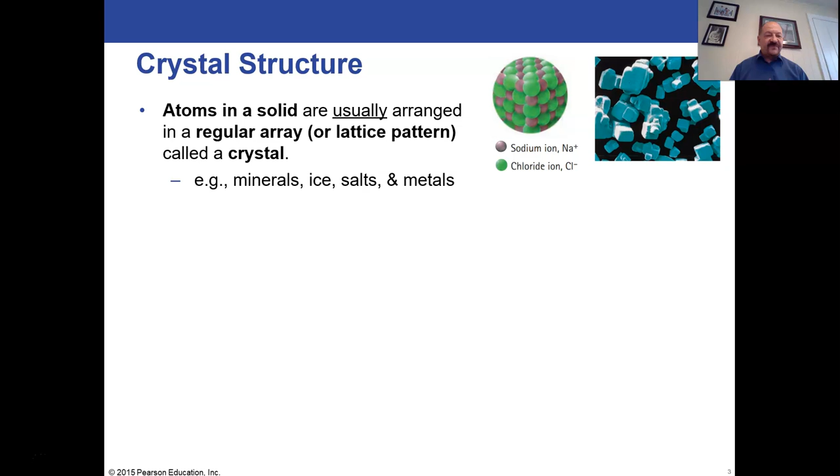So you have this very regular lattice form in a lot of crystal structures. One way that people took advantage of this very regular repeating pattern in the structure is by trying to analyze it with X-rays. It turns out that if you bombard crystals with X-ray beams, X-rays have very, very small wavelengths, and depending on which wavelength you choose, those wavelengths can actually match the size of the atoms, or the frequencies can match the energies of the bonds between the atoms.

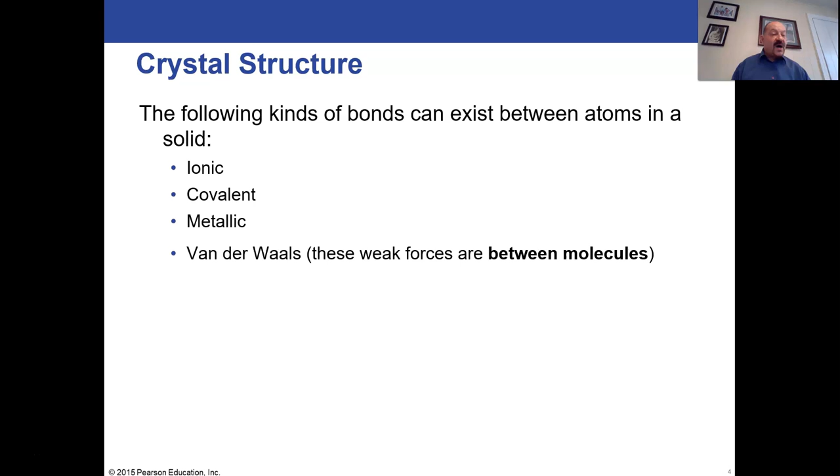We also have a fourth kind of bond, which is actually a collection of different weak bonds between whole molecules. You don't see these so much between ionic and metallic compounds. You see them with covalent compounds - here's a covalent compound and here's a covalent compound, and they have a weak attraction towards each other. There are various types of these weak attractions, all put under the catchphrase of van der Waals forces or van der Waals bonds, named after a famous scientist named van der Waals.

The properties of any solid are dependent on a couple things: which bonds are being used to keep the atoms together, and which atoms are being kept together. That will really determine the properties of that particular solid.

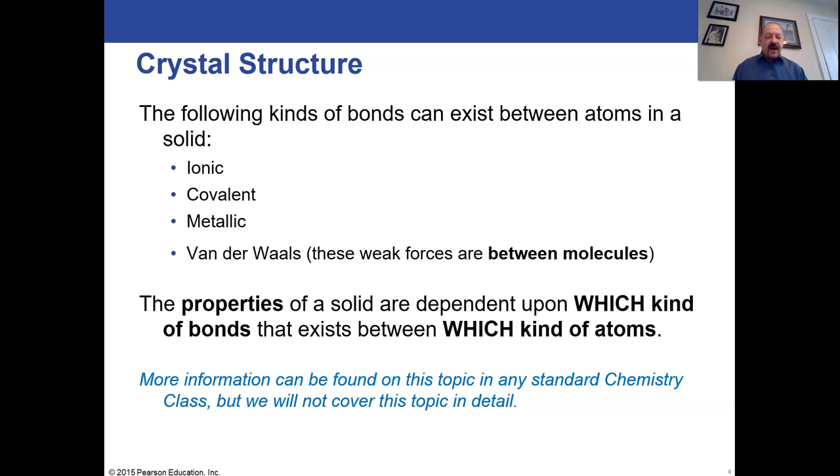Now, obviously, this is not a chemistry class, so if you want more information, I'm happy to give it to you - I teach a lot of chemistry courses, I've taught several at Del Tech, but we're going to focus more on the physical aspects from here on.

Density is a physical characteristic of solids. It's also a physical characteristic of liquids, gases, and even plasmas. It is the amount of mass per unit volume - take the amount of mass, divide it by the amount of volume, and you get the density. This can be thought of as how much stuff do I have crammed in a certain amount of space.

So if I have 1 centimeter cubed - taking a centimeter, which is less than half an inch, and making a box where all sides are a centimeter - that's a cubic centimeter. That box, a cubic centimeter, also called a cc, also called a milliliter, these are all equivalent. If you ask how many grams are in that space, that would be the number of grams per milliliter, or grams per cc, or grams per cubic centimeter. Those are all the same unit.

Here are some of the units, and the ones I just talked about are on the right. The first three in that group: grams per centimeter cubed, grams per cc which stands for centimeter cubed, and grams per milliliter - that's because a centimeter cubed is a thousandth of a liter. A liter is a box about the size of a cigarette by a cigarette by a cigarette. That's a liter box, and if you divide that by 1,000, you get a cc, or a milliliter. Milliliter literally means thousandth of a liter.

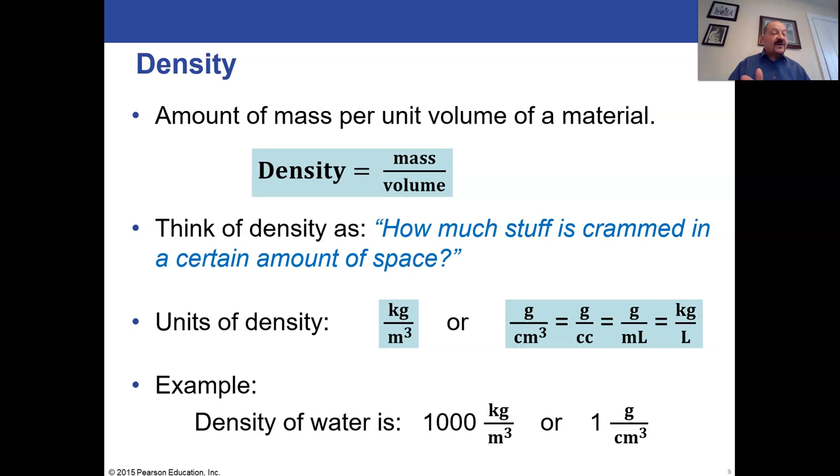1 gram per centimeter cubed, or 1 gram per cc, or 1 gram per mil, is the same thing as 1,000 kilograms per meter cubed. That's because kilogram per meter cubed is a 1,000 times smaller unit than grams per centimeter cubed, and therefore you need a 1,000 times bigger number. So the two values are exactly the same, it's just you're accounting for the different units.

Weight density is very similar to the regular density, which is really a mass density. It's mass per volume for the regular density, it's weight per volume for the weight density. So instead of using units of mass in the numerator, you use units of weight, and that could be either newtons or pounds if you're in the imperial system.

In the metric system or the SI system, you would use newtons per cubic meter. Whereas in the imperial system, you would use the old unit of pounds per cubic foot.

If you want to convert a mass density, a regular density, to a weight density, you just multiply the regular density with the mass per volume units times 9.8 meters per second squared. Remember, that's gravity - if you multiply mass times gravity, g, you get weight. We're just multiplying mass density times gravity to get weight density. The only difference is we're dividing both sides by a volume, which is meter cubed. So there's nothing special with that new formula.

Density depends on two major things: how heavy all the individual atoms are, how much mass they have. If you hear me say heavy, I generally really mean how much mass they have. On Earth, that's similar because we have gravity, but if you're in outer space, we won't talk so much about weight as we talk about mass.

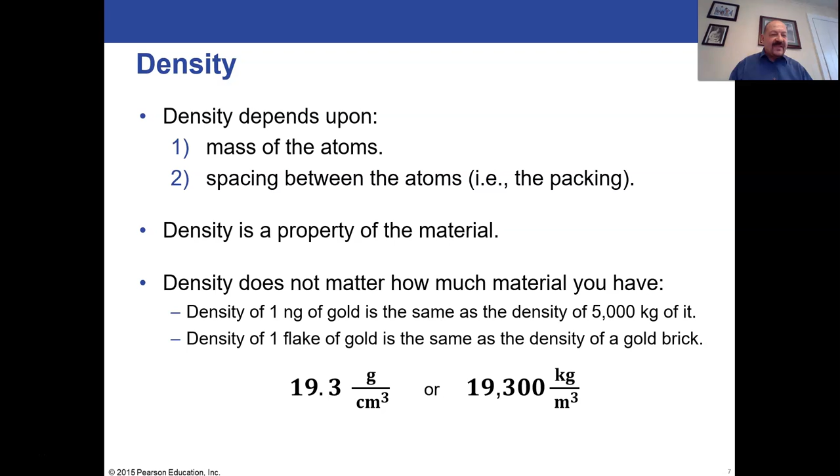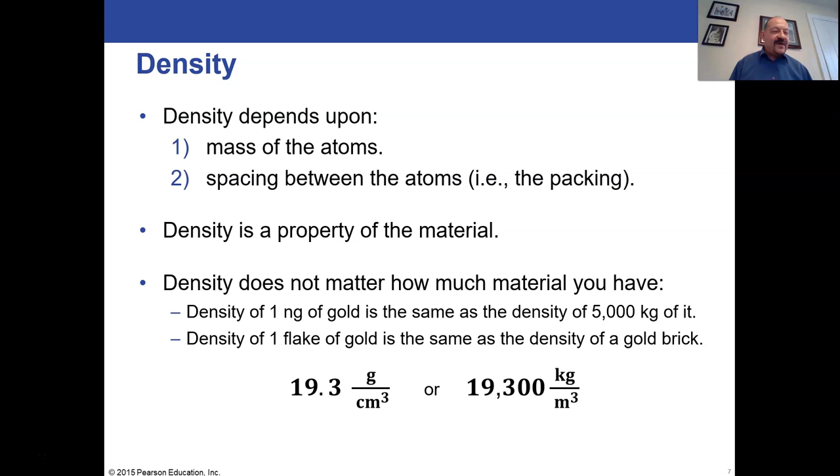Lead actually has a density of a little above 11, so this is almost twice as dense. So if you had a lead bar and a gold bar, and they were both colored gold, you painted the lead bar gold, you would know which one was gold instantly when you pick them up. The gold bar will weigh almost twice as much as the lead bar. So just a little trivia for you next time you watch a movie that involves stealing gold.

All right, elasticity. Now, we're going to talk about the physicist's definition of elasticity, not the everyday use of elasticity. Usually we think about elasticity, oh, it's very stretchy, it's elastic. Rubber bands, those are elastic. Suspenders, those are elastic. A rubber ball, that's elastic. But the physicist has a different way of looking at it.

An object subjected to any external forces, something squeezing it, something stretching it, can change shape if you give it enough force. I think that's pretty obvious. The elasticity refers to how much that object, that material, resists the change in shape when the deforming force is applied, and it also refers to how well it springs back to its original shape when the external force is removed.

So things you usually think about as being very elastic are not really that elastic by this definition. Things that physicists would consider elastic are springs, especially very tight springs that will be hard to move, but once you move them, boom, they spring right back into place. That's an elastic spring with high elasticity. That's the noun we would use.

Most sports balls have a certain amount of elasticity. Golf balls, baseballs, we think of those as solid objects. But if you ever look at photographs of just when that ball is hit by a club or a baseball is hit by a bat, you will see major deformation of the shape of that ball. The ball will be flattened something fierce as the force comes in, and the ball will be compressed on a side as it's being hit. But it resists that hit, it does have to give because you're hitting it with so much force. But what makes it elastic is the fact that as soon as you hit it and the ball flies from the bat or your club, the ball immediately springs back to its original shape. So that would be considered high elasticity.

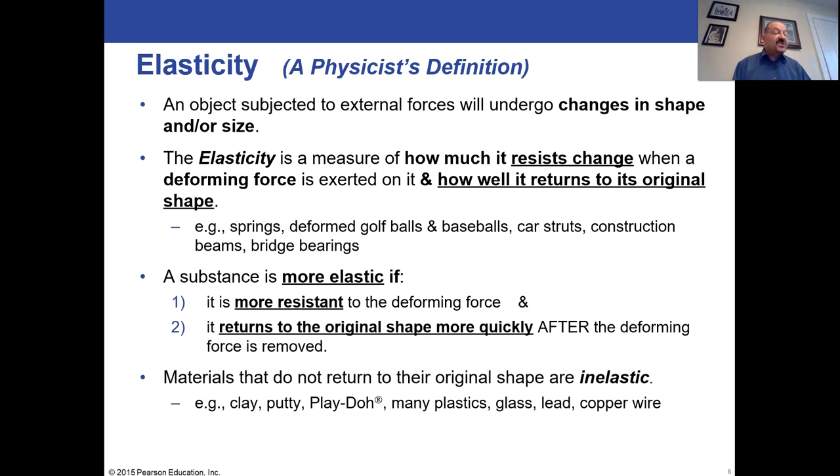Most glasses aren't. Lead's a soft metal, gold's a soft metal, copper is a soft metal. All of those, if you bend them—if you took a copper wire and bent it—it's not going to spring back, you'll see it'll just stay there. If you had a piece of lead and you were able to bend it or hit it with a hammer, you can flatten it very easily, and it's not going to spring back. But steel, that's going to spring back.

Reinforced alloys, strong alloys, metal alloys—alloys are mixtures of metals, usually mixed for some purpose. So bronze, brass, steel, these are all alloys of metals. They're a mix of metal and either other metals or metals and other substances.

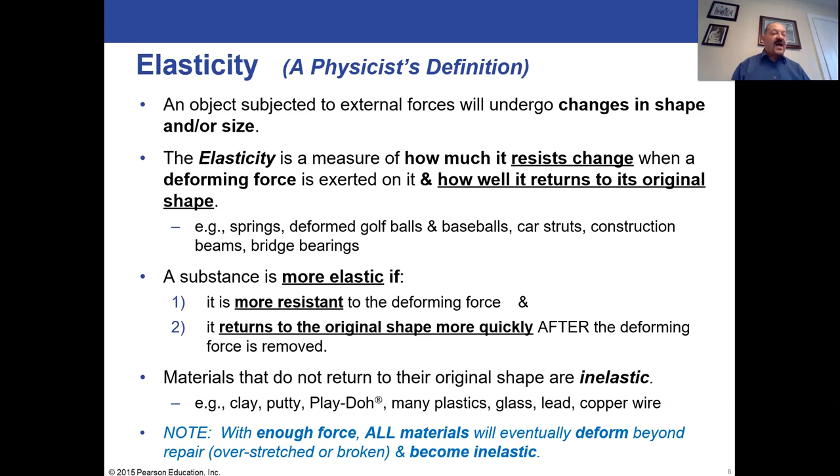With enough force, all materials can be deformed. If you take a steel ball and put it under a heavy press with millions of pounds of pressure, it's going to deform and it's not going to come back. Eventually, you'll overextend the elasticity of almost any object. So it's not that it's forever with its elasticity—it's not an infinite elasticity. It has to give eventually.

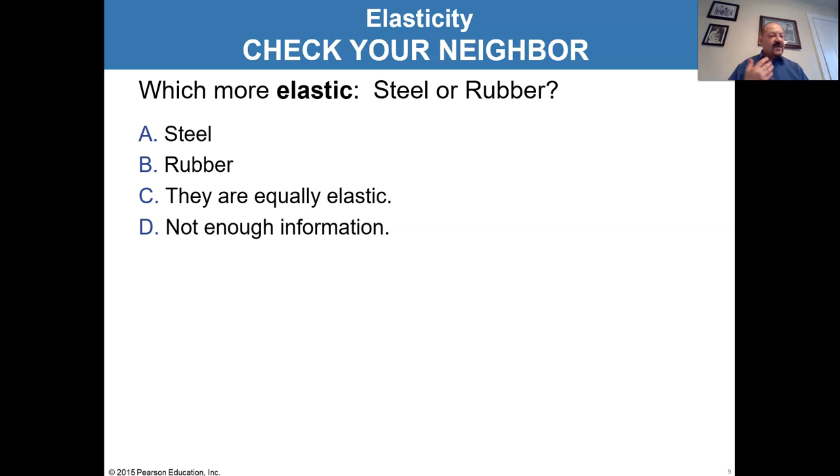All right, so what's more elastic? I think you probably already know this from what we talked about: steel, rubber, they're equally elastic, or not enough information. Well, I think clearly from our discussion, steel is the more elastic by a physicist's definition. It's more resistant to change, and it's quicker to reform its shape. We think of rubber as being very fast to reform its shape, but steel is even faster. Steel really does not want to be deformed at all, and so it'll return to its shape immediately.

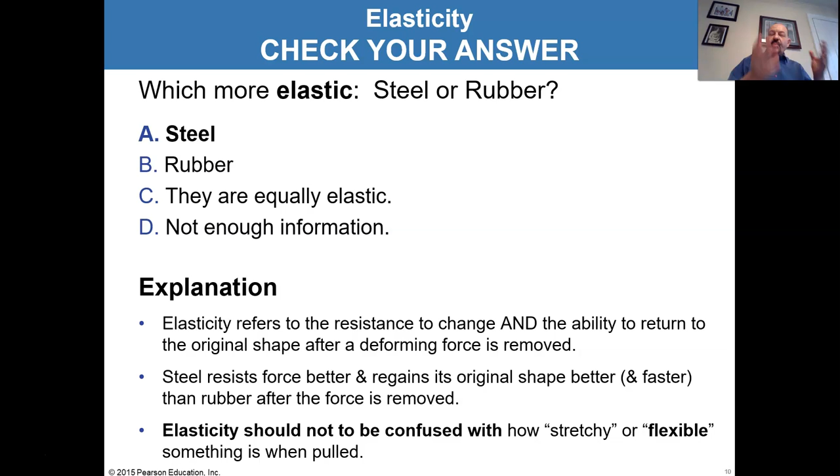It resists force much better than a lot of materials. Titanium is another thing that really resists force on it, and they will retain their original shape and return to their original shape much faster and quicker than things like rubber or plastics would. So don't confuse how stretchy or how flexible something is with elasticity as a physicist uses the term. Flexibility and stretchiness—that's how you usually think of elastic, but to physicists it's a very different definition.

And this leads us to something called Hooke's law. Hooke realized that if you took a spring and you put a weight on the spring or you pulled a force on the spring—so it could either be a horizontal spring and you're pulling a force on it, or a vertical spring and you're putting a weight on it, which is a force. Remember, weight is a form of force, it's just the force due to gravity for that mass. It'll pull the spring, it'll extend the spring.

And if you push the spring with a certain force, you can squeeze the spring together if it wasn't already packed together tight. So the amount that you stretch a spring or the amount that you compress it relative to its resting state—a spring might be resting and have some space between it and be very stiff, like the strut of a car, and you'd have to put a lot of force on it to squeeze it, and a lot of force outwards to extend it. So that change in distance, whether it's squeezing it smaller or stretching it bigger—the delta x, the change in length—is directly proportional to how much force you put on that spring.

And because it's directly proportional, we can just throw in a constant to turn that proportionality into an equality. They call it Hooke's constant, for obvious reasons. So the equation would be force equals some constant, and every spring has its own constant.

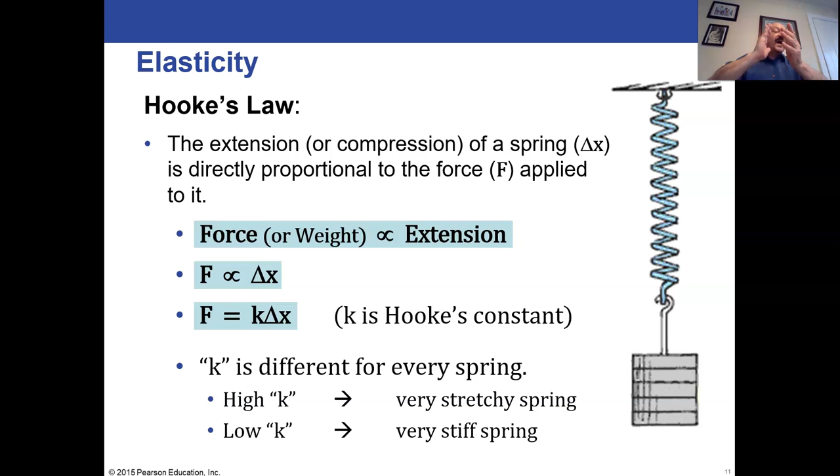Well, let's think about this for just a second. Look at the little spring here. You've got a weight sitting on top of it. We know that the amount of stretch, not the full length, the change in the length, how much it's stretched, not what it's stretched to, is the difference from what it stretched to minus what it used to be.

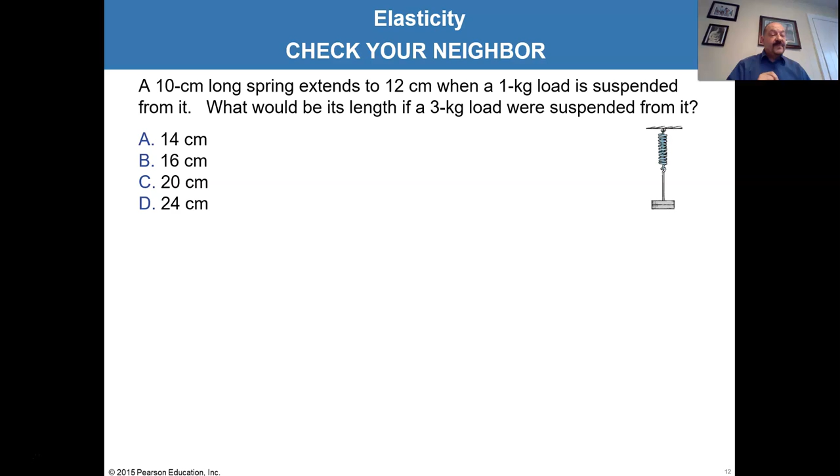That difference in length is directly proportional to the force. Well, we know that the force is directly proportional to mass because we're on Earth and we have gravity. So if we know that the change in the length of the spring is directly proportional to force, and we know that force is weight in this case, we know that's directly proportional to mass. Remember, it's mass times gravity. Well, then the change in the distance must also be proportional to mass.

So it doesn't matter whether we use mass or force units, whether we use kilograms or newtons that we're pulling a spring down with, or stretching a spring horizontally. Horizontally we have to use a different formula. We can't really use mass in that case because it's not gravity horizontal. But if vertical, it can be force or weight. It doesn't matter, it's still the same proportional relationship with how much you change the length.

Now look at this problem. We used to have a 10 centimeter spring. It was extended to 12 centimeters. That means we increased the spring by 2 centimeters, not 12, 2.

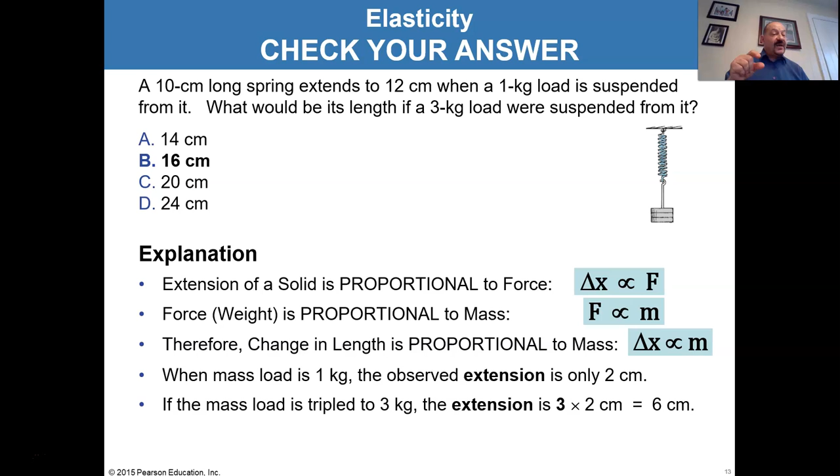2 is the length that was increased by a 1 kilogram load. If we have 3 kilograms, we're going to triple the load. We will triple the extension length. So instead of 2 centimeters, we will extend it to 6. But remember, the original spring was 10 centimeters. So we add that to the 10, and we get the answer 16 centimeters.

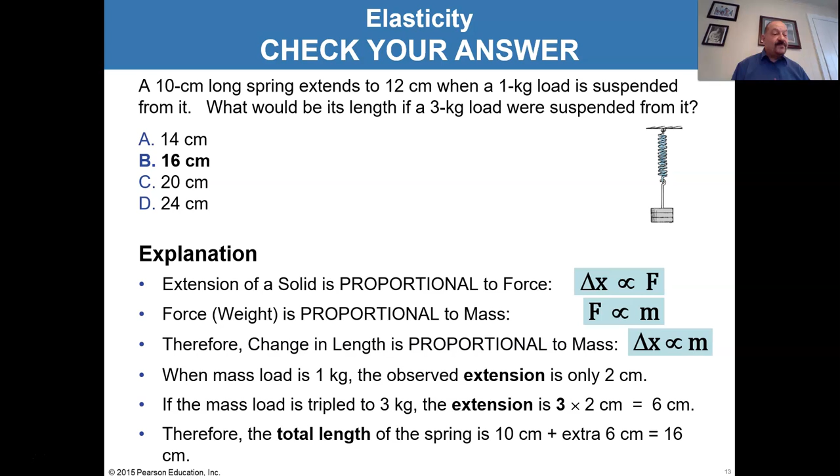So you have to be a little clever about this. You have to remember, okay, they didn't tell me how much it actually extended. I have to read the problem carefully to see how much it stretched or compressed. It'll be the same answer. And then compare the difference in the loads, whether they're both kilograms or both newtons. It's not really that important for this kind of problem.

All right, so when something's stretched, when something's pulled, we call it tension. We call it under tension. That is a stretching of something. And we've talked about this with tension forces and wires and cables and ropes, string, etc. That happens all the time. You see tension whenever anything is pulling on it, when two things are hanging from a rope that's over a pulley or whatever. You get tension in the string.

You can get tension not just in very flexible things. You can get tension in very solid things, like steel beams in a building, or tree limbs, or rocks, that are put under tension because of pulling forces on either side. When things are squashed together, it's just the opposite.

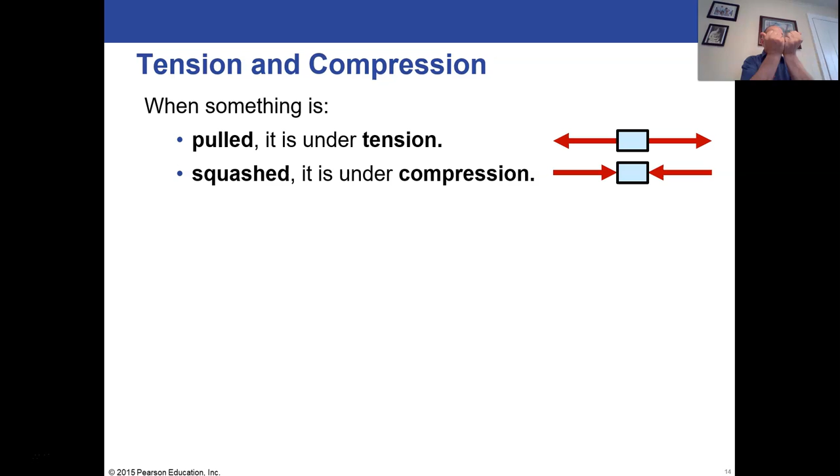We call that kind of force compression forces. So you have compression forces squeezing together, and you have tension forces pulling apart. Here's an example where you'd find tension forces and compression forces.

So if you have a girder that's under stress, and this is a steel beam sticking out from some structure with its own weight hanging off it. In this picture we're showing an additional weight, but we didn't have to. The beam itself has its own mass, its own weight. Think about where the center of gravity is on that. It's pulling it down, and it's putting stress on it.

That stress will end up bending the beam. You might not see it, but there's a microscopic amount of bending in some cases, and it's stretching the top surface because of the way it's bending, while the bottom surface is being compressed. You can even do this with your finger: if you take your finger straight and bend it at one knuckle, you can see the top of your knuckle is stretched out, and the bottom is kind of squished together, with all the skin and muscle compressed. That's your compression, that's your tension.

So you don't need any aid, you can just look at your finger and see it. If I have an object where the stress is at the ends, if the weight is at the end pointing down, I will put tension on the top and compression on the bottom.

Now what's interesting is if you have a lot of tension on the top and a lot of compression on the bottom, as you go through the thickness of this material, the tension gets less and less, and eventually you start getting more and more compression, which is in the opposite direction. What that means is in the middle there has to be some point where the amount of tension is exactly equal to the amount of compression, and therefore there's actually no stress at the center line of that object. We call that the line of zero stress - the part where there aren't any forces stretching or compressing in the length of that beam or tree limb or whatever structure you've got.

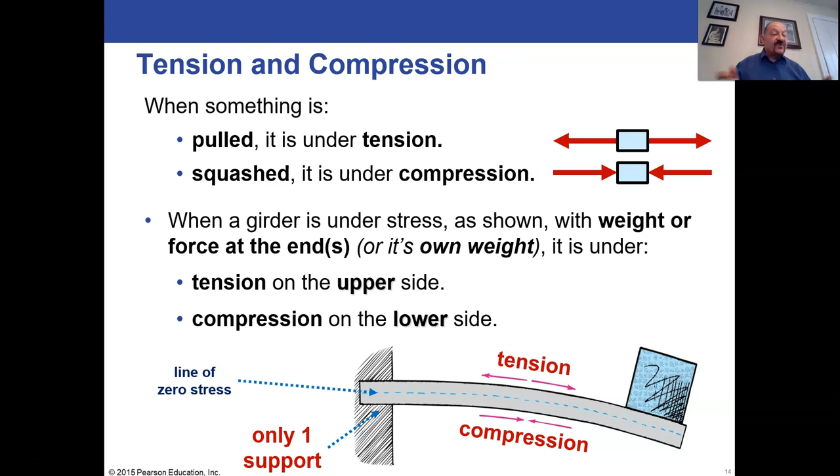Now compare this to another situation where you have two supports on the object. Where is the center of gravity? It's in the center - I show a weight on top, but I didn't have to. The center of gravity is still in the middle of this beam supported on two ends. So it's weighed down in the middle, and now the tension on the bottom is being stretched, and the top is being squeezed together.

If you want to convince yourself, I've got a little stick here, so I'll take a stick - you've got forces of support on the left and the right, so I'll push up on those forces like that. It happens so quick you can't really see it, let me get another stick here. But what you should see is the bottom splitting apart. There we go, bottom split - because it was torn apart by the tension forces, while the top has compression forces, and that's what kept the top of this together.

Now if you wiggle it back and forth, you switch the tension forces to the other side, and it breaks. People do this all the time with sticks and don't realize that's what they're actually doing - putting a tension force on one side, then a tension force on the other side, depending on how they force the material.

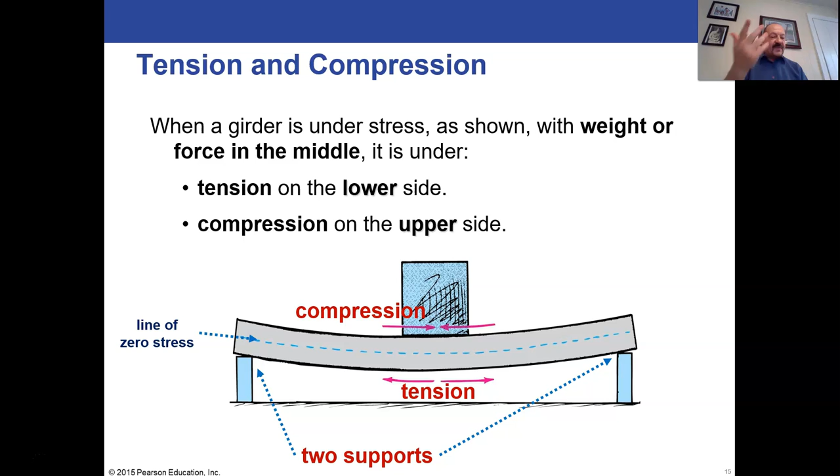So I-beams are used in construction very commonly, and you might have wondered why it's shaped like this. Well, it turns out the reason is because of tension and compression forces. If we had an absolute solid beam of metal - rectangular cross-section instead of this I-beam where the cross-section looks like a capital letter I, that's why it's called an I-beam - if we had this big, heavy, rectangular-shaped beam solid all the way through with no indentations, that's a lot of mass in the middle.

But when you put this beam in, layered with the wide part on top and the wide part on the bottom, remember, whether it's sticking out of a building with tension forces pushing on the top and compression on the bottom, or it's being supported by two different supports—think of my elbows as supports—and weighed down in the middle, with tension forces down here and compression forces up here, it doesn't matter.

The beam is thickest at the part that has all the stresses on it. So it's wide at the top of the I-beam, it's wide at the bottom of the I-beam. No matter how you're using the beam, as long as you orient it this way—you don't want to turn it sideways, that defeats the purpose of the beam.

You keep it like this, and now the tension forces, if they're on the top, and the compression forces on the bottom, there are two thick parts of the beam there. And if you have a different structure where it's switched, it's still the compression forces are on the top and the tension forces on the bottom. It's still wide on there.

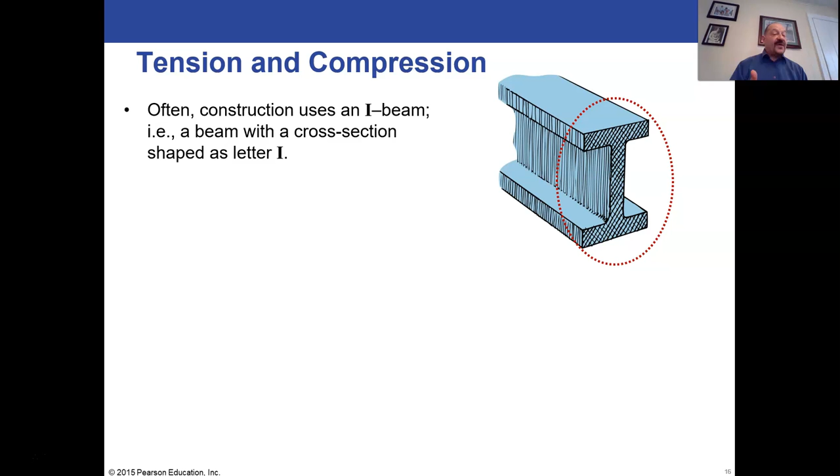You don't need all that extra metal. It just provides extra weight without that much extra strength. The middle part of the I-beam is just there to connect the two strong parts of the beam together. So this is a really efficient use of steel, without using too much steel, to get a maximum amount of strength where you need it for tension and compression in a structure.

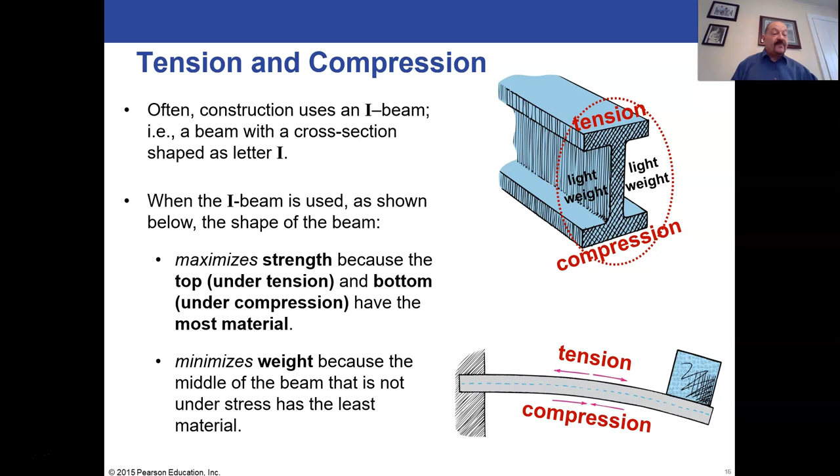So it maximizes the strength on the top and the bottom, whether the tension's on the top or the tension's on the bottom, and vice versa for the compression. And it minimizes the weight in the middle. So think of it as if the weight was just scooped out of the part on the sides that you didn't need it for. It just has extra weight that has to be supported by the rest of the building underneath it, so you don't want that. And it's also more expensive to have more metal.

So here's a question that uses these concepts. Suppose you drill a hole horizontally, cutting right through a tree branch, as shown. Which hole will weaken the branch the least? The one near the top, the one near the middle, the one near the bottom, or it doesn't matter?

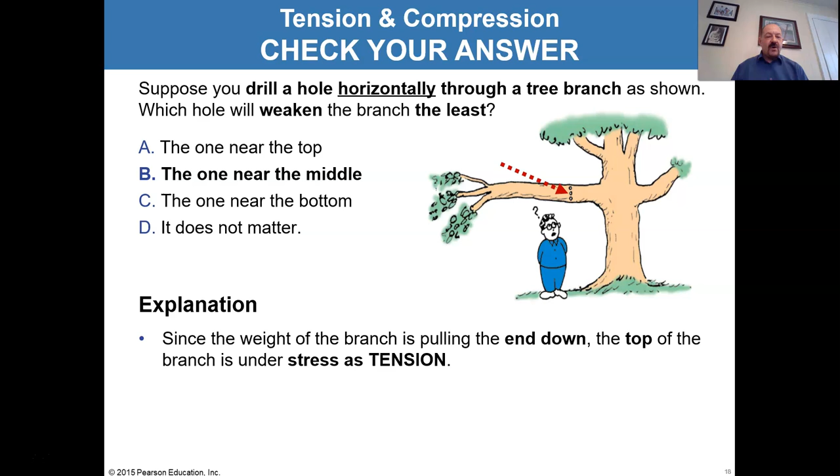Well, think about this. This is a tree branch. It's sagging from its own weight, hanging down, which means the forces are pulling the end down, and you're going to get tension on the top. You'll also get compression on the bottom. Remember, it's like your finger—think of the weight on your finger. Here's the end of the tree branch: it's pulling down, stretched on the top, compressed on the bottom.

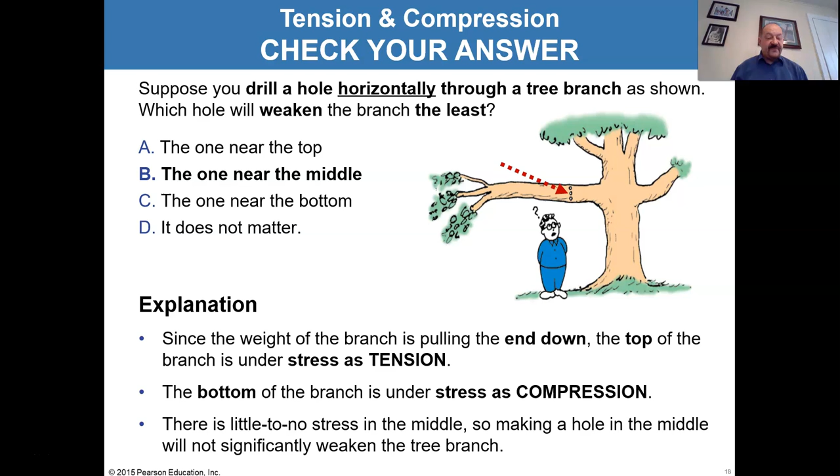Those are the places where you need wood to support the tree branch the most. You want the wood on top for the tension, you want the wood on the bottom for the compression. Otherwise it might break. The wood in the middle is not nearly as important. By drilling one hole in the center, you're probably not going to change the strength of that tree branch that much, and therefore you would carve it in the middle.

So another structure that takes advantage of these compression and tension forces, especially the compression forces, are arches. Before the days of arches, people had more or less flat roofs on all the structures, and they required a lot of supports at different points. This is a picture of the Parthenon in Athens, Greece.

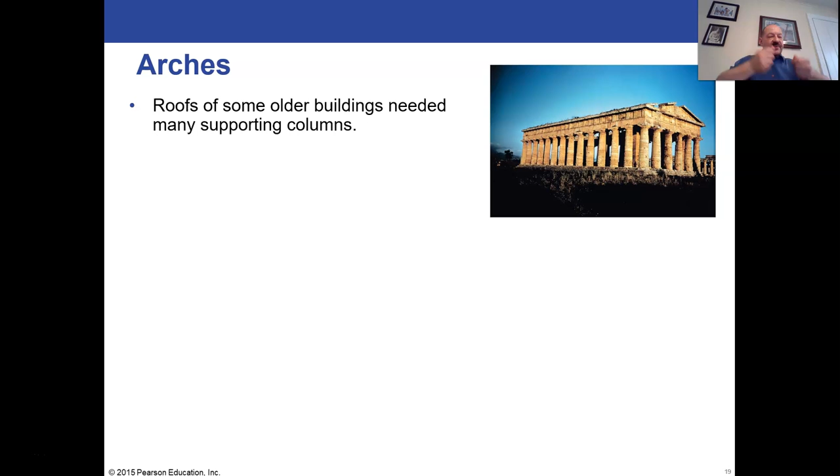The ancient Greeks barely used arches at all—they weren't really common. The arches were invented probably in Mesopotamia, present-day Iraq and surrounding areas, Iran, Egypt, possibly Syria, but they didn't get to Greece too much. So Greece used these long roofs with lots of columns that were necessary to hold up this roof structure because it was so heavy—it's made of stone.

Arches were invented by Middle Easterners and Near East people. They were also used in ancient Mexico, ancient China, and ancient India, but not very much. Nobody used them that much until the Romans, who learned it from the people that lived in Italy before them, called the Etruscans.

They went wild with arches, loved arches, and became masters at the architecture of arches. Arches really take advantage of compression forces. Instead of making compression a disadvantage, they make it an advantage by shaping the structure in this arcing fashion, making the arch. That's why it's called an arch - it's an arc. The supporting columns on the side of the arch are all you need.

You don't need all these extra giant columns shown in a typical Greek temple. The arch will support a lot of weight if you build up a flat surface on top of the arch. It takes advantage of compression, because the more weight you push on it, it pushes along the curvature of the arch itself, and it's all compression forces.

So you have the weight on top, and because of the angle of the arch, the forces are directed along the stones that form the arch and eventually end up pointing down. The more force you put on, the more you compact the arch - higher forces actually make the arch more stable due to this beautiful compression parallel along the lines of the arch, and therefore it squeezes the rocks together, making the arch even stronger.

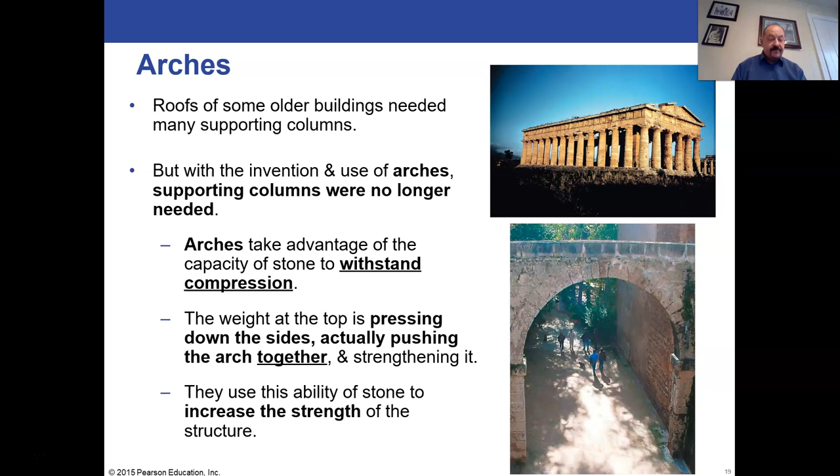So they use the ability of stone to increase the strength of the structure. Stones are terrible at withstanding tension forces, being ripped apart, but they are excellent at not being compressed. That's why an arch is such a beautiful thing to make when stone is your main building material.

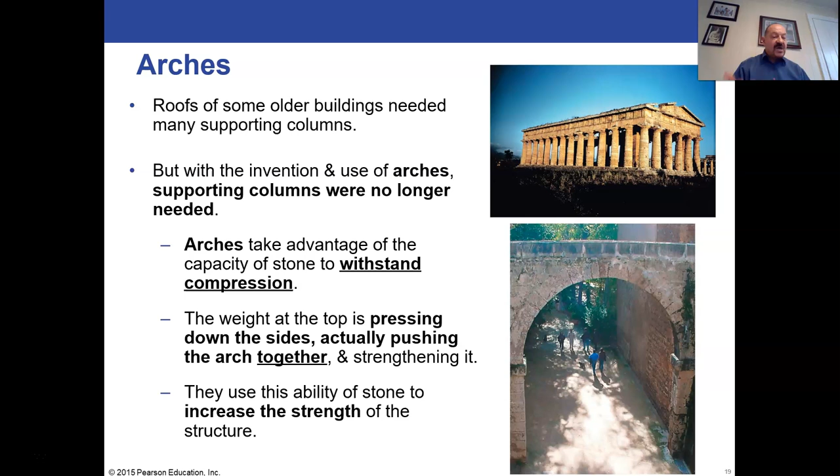Not a hyperbolic parabola, a hyperbolic cosine. This shape is also known as a catenary. The reason it's called a catenary is it comes from a Latin word, catena, which just means chain. So literally, if you hold a chain, you'll make a catenary shape, a chain shape. It turns out this shape has a lot of strength for supporting itself, either when hanging down low or when turned into an arc structure.

The famous St. Louis Arch in St. Louis, Missouri, has that shape - it is a catenary shape, a hyperbolic cosine. Because of its shape, the compression forces actually hold it together, which makes it very hard to build. It doesn't have the strength of the structure until that last piece is put in.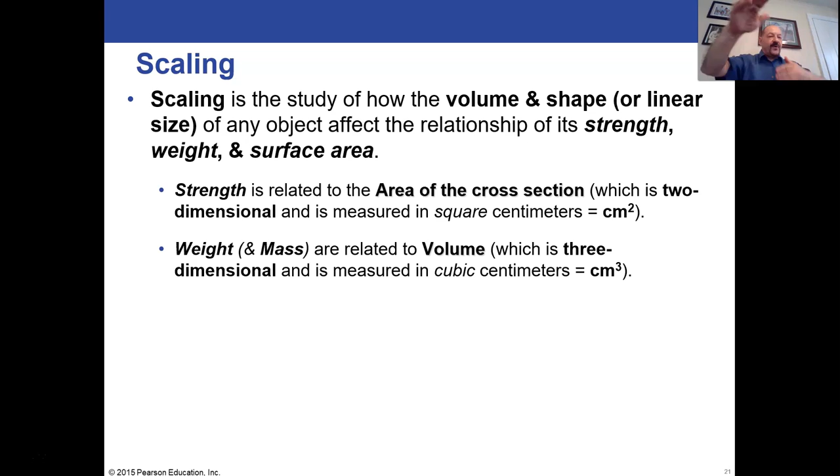If you're making something bigger, the volume is going to change a lot faster than the area, and that means the weight is going to change a lot faster than the strength. If you go down smaller, the weight will change dramatically and the area will change less - the area will always change less than the weight, the weight will always be the bigger effect. If you're going down in size to something smaller, you end up with really good ratios of strength, the squared term, to the mass, the cube term.

But if you're going up big, eventually you get to an object that's so big, like animals bigger than dinosaurs got, that the strength of their bones can never be enough to support the mass of their volume.

So people who build structures or look at animal structures have to be concerned with this ratio of surface area, which is a measure of strength, to volume, which is a measure of weight or mass. You want to make sure that when you scale something up from a smaller version to a bigger version, you have enough strength to cover the much bigger mass that grew a lot faster.

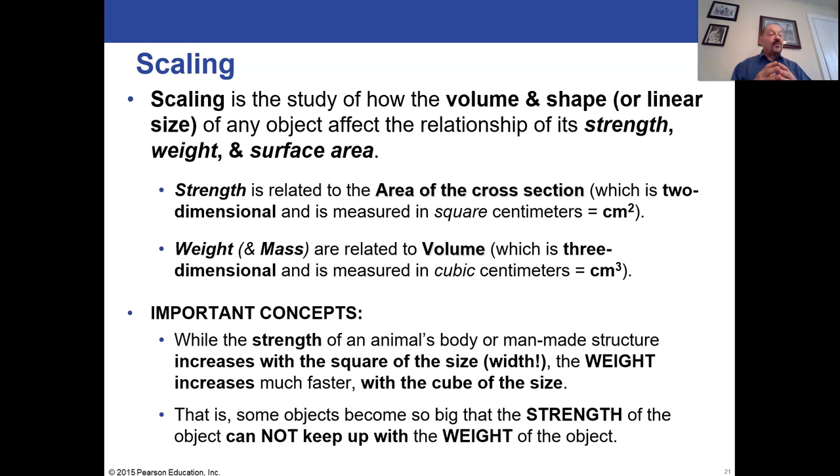But what happens when you double the length and width? When you double the width, you're also doubling the height and the depth. Like in the Austin Powers movies, Mini-Me was 1/8 the size of Dr. Evil, because they made his height, width, and depth all half. Half times half times half is 1/8. That's a scaling thing - they scaled him down by half in all dimensions, which is why he ended up at a 1-to-8 ratio.

In the case of doubling, you get the same kind of thing. The volume is now 2 by 2 by 2, which is 8. So instead of a volume of 1, we have a volume of 8 - we've increased it 8-fold by doubling the width. But the area of any one side, a 2 by 2, only increased 4-fold. The volume and mass both go up 8-fold, so the weight goes up 8-fold, but the strength only goes up 4-fold.

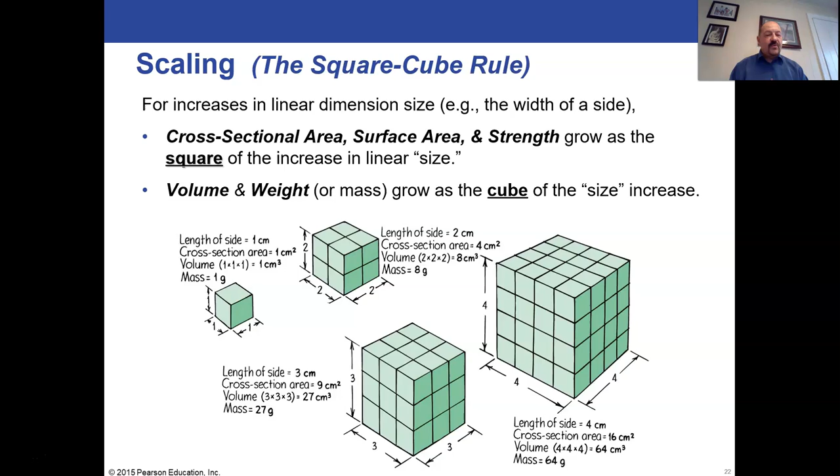Because the surface area goes up by the square - remember, surface area is related to strength - and the volume, weight, and mass go up by the cube, you get this relationship: surface area is directly proportional to the size squared, meaning some linear dimension, over the volume, which is related to that dimension cubed. When you take a number squared divided by the same number cubed, you cancel out two of those sizes on top and two on the bottom, leaving just 1 divided by size. So the surface area to volume ratio is proportional to 1 divided by the size.

What does this mean? Think of the surface area to volume ratio as a single variable - call it x. That variable is inversely proportional to the size, because size is on the bottom of the fraction. So the surface area to volume ratio is inversely proportional to the size. That means if you change the size twofold, you decrease the ratio of surface area to volume twofold. If you increase the size 100-fold, you decrease the ratio 100-fold.

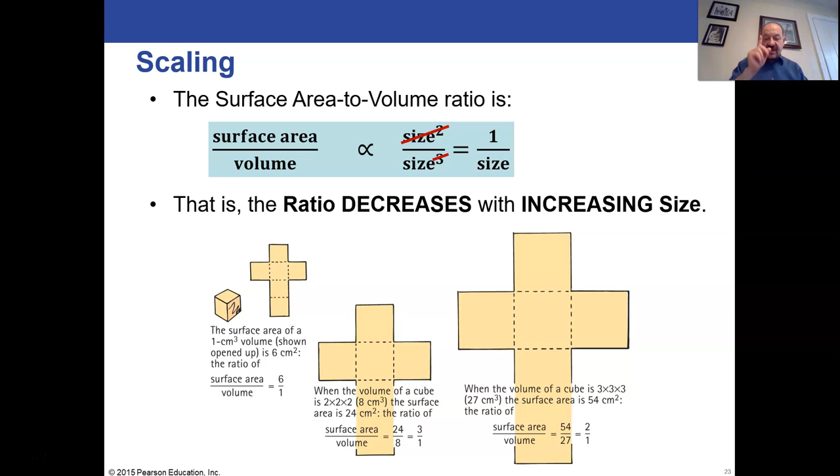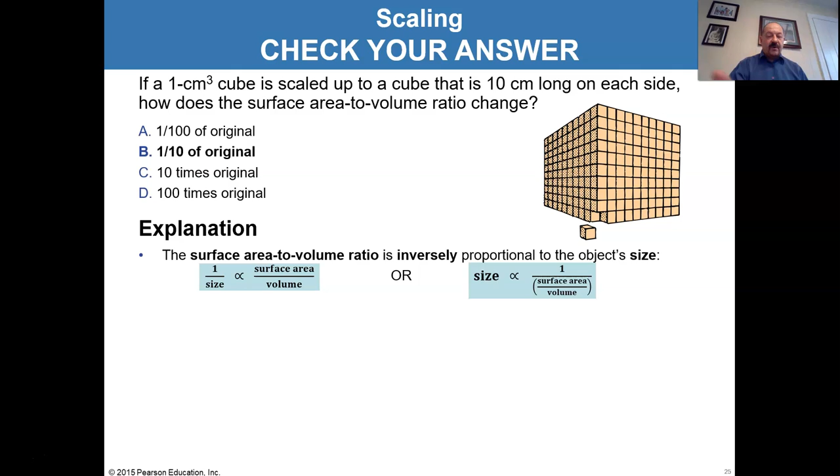The one on the left is the one I just showed you, I just switched the order. The one on the right I literally inverted both of them - instead of 1 over size, I made it size, and instead of surface area over volume ratio, I made it 1 over the ratio. You can look at it either way, whatever is easier for you to think about. If we scale up the size tenfold, the ratio will go down tenfold. It's as simple as that. They're inversely proportional.

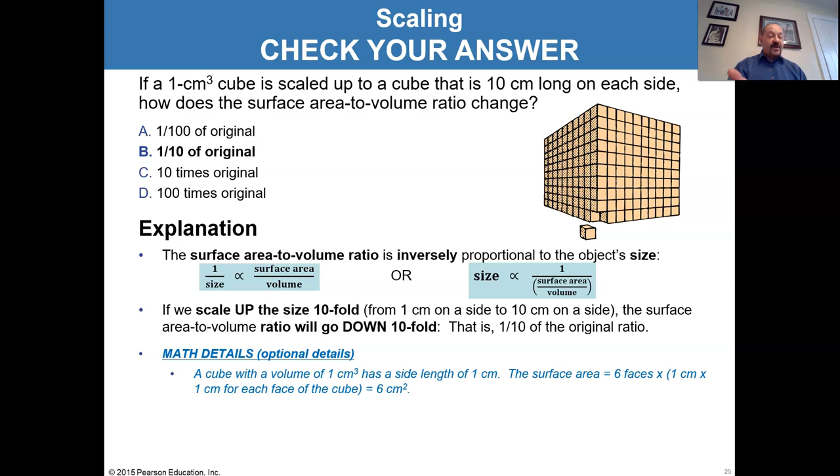If you want the math details: a 1 centimeter cube has a surface area of 6 square centimeters - that's all the sides added up - and a volume of 1. But the big one has a volume of 1,000, since it's 10 by 10 by 10. The area of each side is 10 by 10, or 100, and we've got 6 of those, that's 600. So the ratio we used to have was 6 to 1. The new ratio is 600 to 1,000, which is 0.6. So we went from a ratio of 6 to a ratio of 0.6, and you'll notice the new ratio is 1/10 of the old ratio.

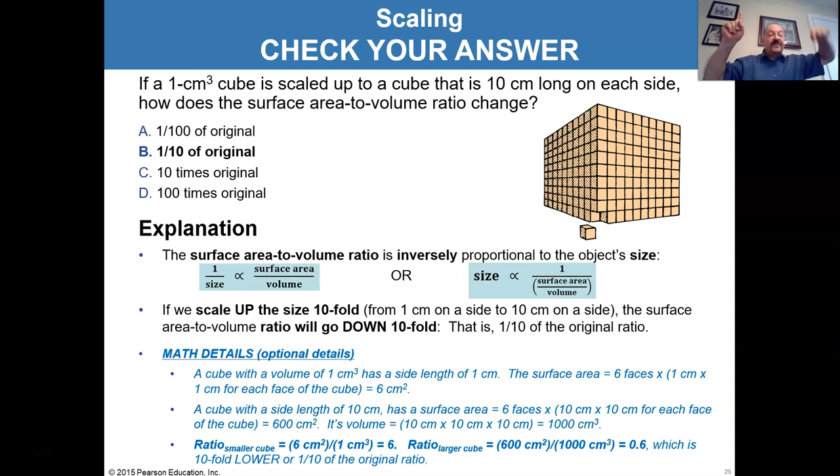You don't have to work out all the individual pieces. You know there's an inverse relationship between the linear size and the ratio of surface area to volume. Change one, and the other will change accordingly - if you increase one, the other will go down by the same amount, and vice versa. And we'll stop here. Thank you.